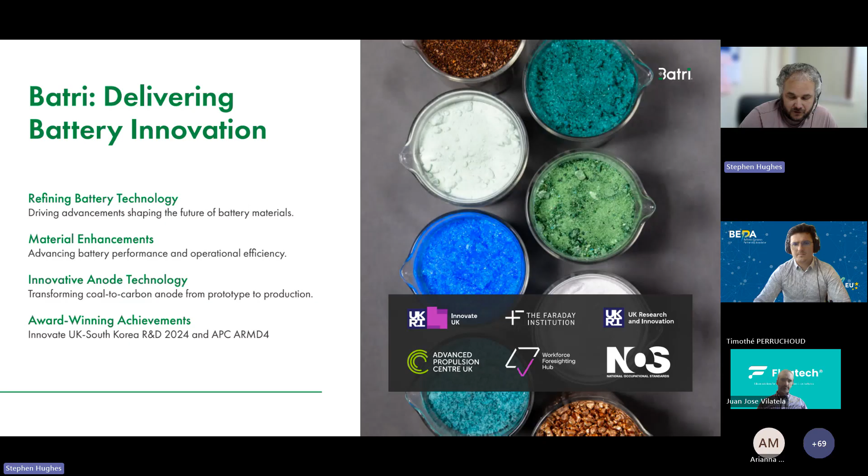Our main material, our focus of our first material, is an anode material, a hard carbon for sodium-ion batteries, and we use coal, locally sourced coal, to create this. So we've got a really secure and scalable supply chain. The good thing about talking to battery people is I don't have to go into supply chain issues and too much into what the current market is.

But if we just look at sodium-ion batteries and the potential for growth in this market, it's accelerating rapidly. We're seeing in forecasts increased production growing at an exponential rate, 150% increase in the tracked production volume for 2030 over the last couple of years. This is also seen with headlines such as CATL's Naxtra battery, and the US putting solid sodium batteries on the grid. So there's a lot of significant backing coming here.

The key thing that we're always asked is, where are sodium batteries used? It's not just for static storage opportunities, not just for grid scale storage, although that will take up a lot of the beachhead market. We're also looking at non-road automotive applications - your 2-3-wheelers, scooters, e-rickshaws, and non-road applications, forklift trucks or the vehicles you'd have at airports. They make up some really interesting markets that are niche, but they're high value niche. So this is where sodium has some key advantages.

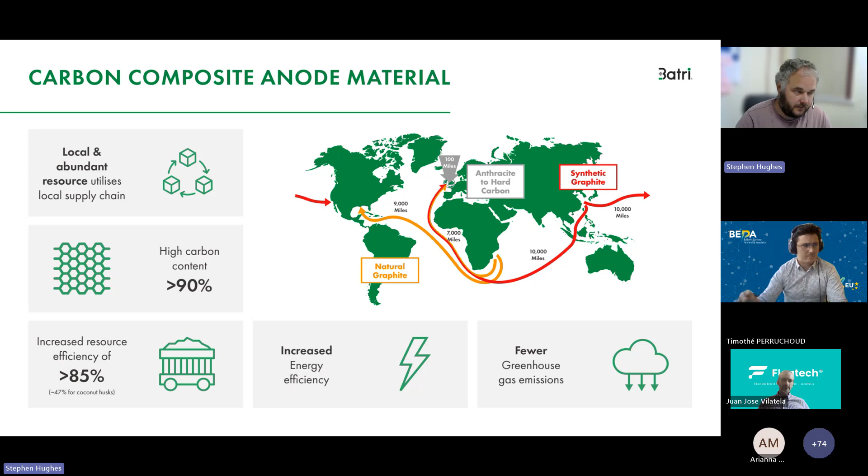Just a couple of slides on the data of our materials - I'll skip through these quite quickly, but we're commercially viable. We match and outperform a lot of the materials available on the market, and again this data is all backed up through academic verification.

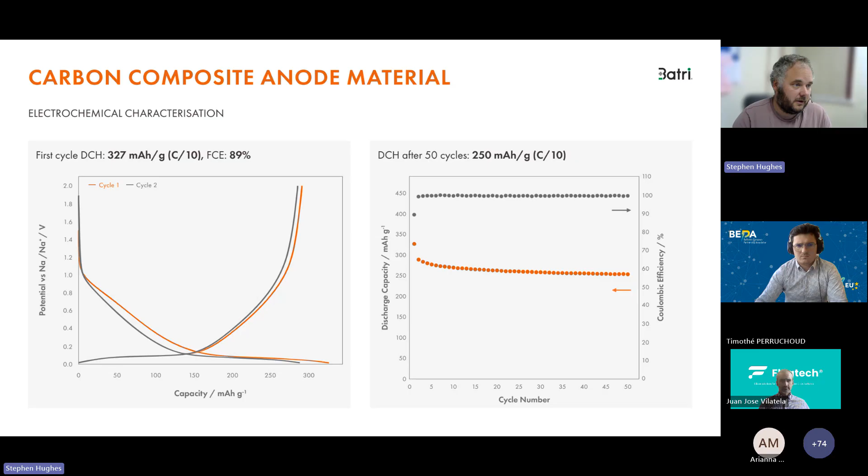Some impressive first cycle data here, reaching about 330 milliamp hours per gram. We've got really good long-term stability - you can see after 50 cycles it's totally flat, and then we did an extended accelerated lifetime test over 10,000 cycles where we retained approximately 87% of its capacity.

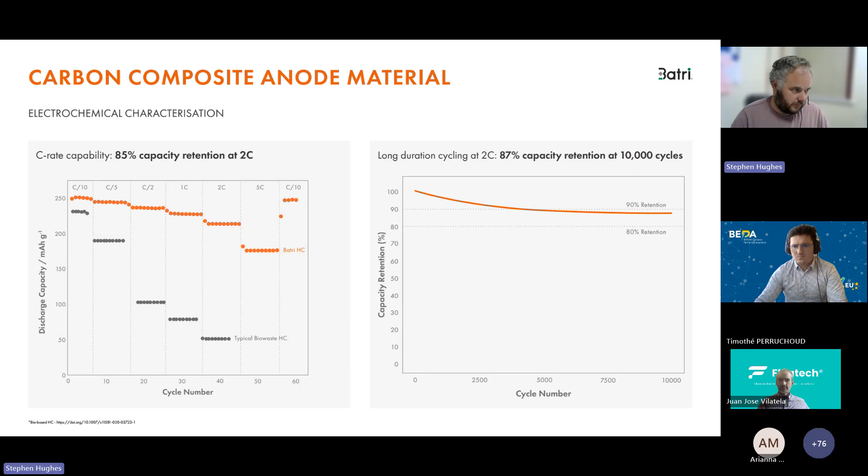The really interesting thing with the material we've produced is this rate performance. In real world applications where we're seeing these batteries go into potentially automotive, power tools, or static storage, where you need to cope with peaks and troughs, the performance of our anode material is really impressive.

Breaking news really - earlier this week we incorporated Batri US, so we can start working on the market over there. As everyone's aware, with all of the tariff things going on at the moment, it's really important to have US based manufacturing if you want to work in the US. So we're able to work on these transatlantic partnerships now, and that's opening a really interesting market for us.

The SNAP program that I touched on at the very beginning develops and integrates cells into products that will be made by our Korean partners, so there's a full cell development pathway we're looking at. We're seeking partners who want to put these into demonstration and pilot programs, whether that's e-mobility or storage applications. We're very open for collaboration here - we're not one of these companies that comes to you and says this is what we've got, you take it as it is. We like to work with people and try to give them what they need.

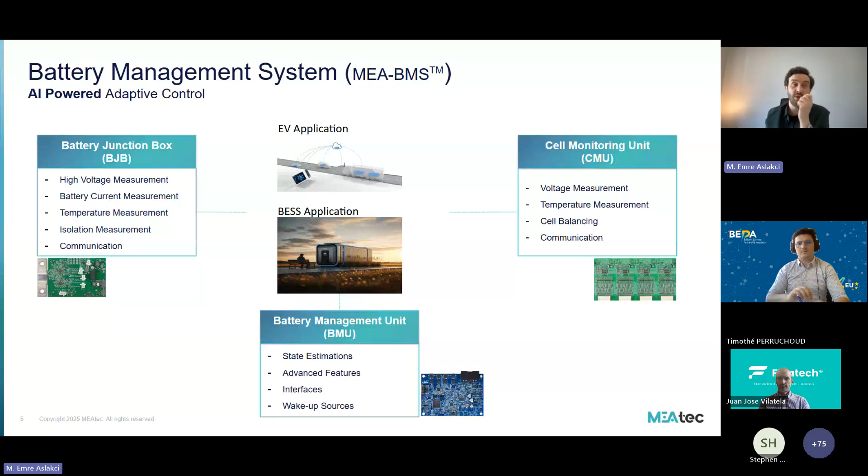If we break it down into each product, we have the BMS system, which has hardware and then the advanced software, which we are working on, especially nowadays we are intensively working on AI-driven functions to fit into the real hardware. This is a bit of a challenge for every provider, to fit these advanced algorithms into the physical system, but we now do this application. We also have POC-ready applications, and our solutions are applicable for both EV and BESS applications. What is different in our product?

This is AI driven, and we have a hardware independent solution, which means if you have your own hardware, we can come with our advanced software and fit your architecture, then run with our software. This is of course safety compliant, and while there are many BMS suppliers, there are very few automotive grade BMS suppliers. We are one of them. The key functions, SOC, SOH, and the safety functions, we implement with advanced techniques using physics-informed machine learning to have the best accuracy.

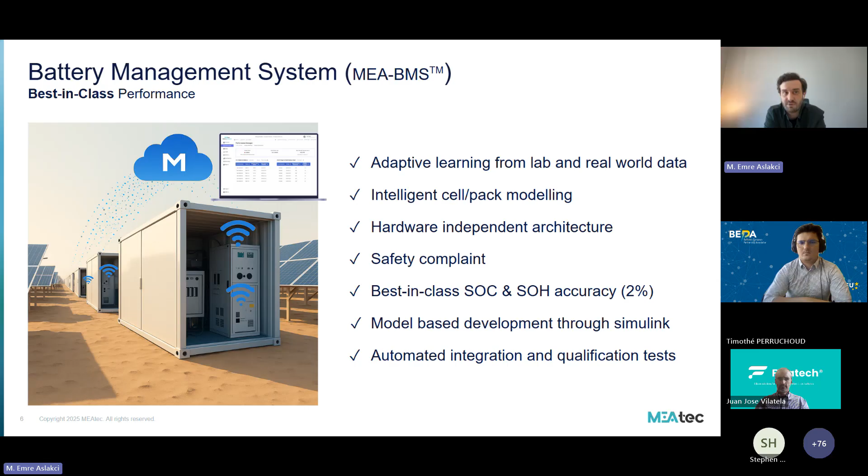And of course, the model-based development is important for the modularity of the software component. This is how our second product, battery analytics, looks.

Actually, we have two different platforms. One applicable for EV fleet management, the other one for battery energy storage. Here we use what we have in the physical BMS. Physical BMS can only detect what happens, but in the battery analytics software, we have smart algorithms in the cloud which can predict the future. That makes the difference.

We implement all of those things in the cloud application. In the physical system, everything is different - we use Simulink, Simscape, and real hardware. But when we move to the cloud, we use AI, integrating our software into AWS or other providers. Things are very different, but at the end, we implement both logics with our battery competence in the background.

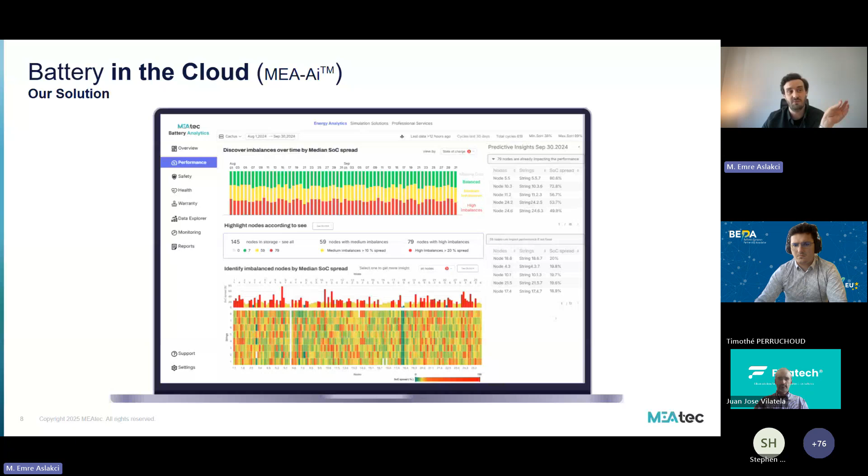This is how our solution looks in the user interface. We have performance criteria, safety, health, and warranty, and we can see each and every node in our platform for the customer.

This is also one of the architectural reviews, how it works. We get the data from the physical system, from BMS - this data is already available. We get this data either over TCP/IP directly with Wi-Fi or 5G, or through SCADA, depending on the application. The data comes to our cloud, and accordingly we run all of our advanced algorithms and the physical modeling we did for the battery and cell.

Our third product is the battery passport platform, which we offer to our customers. In Europe there are 6 to 7 battery passport providers, but we are different than them. What they do is get the data from the physical system, put it in the cloud, and read it out. We do it differently.

We create a digital twin of the battery, and we get the data. We use this data to also create usable information for the operation. We call it battery passport integrated digital twin in the cloud. This makes us different from the other competitors - we also bring our battery know-how into an application to give service to our customers.

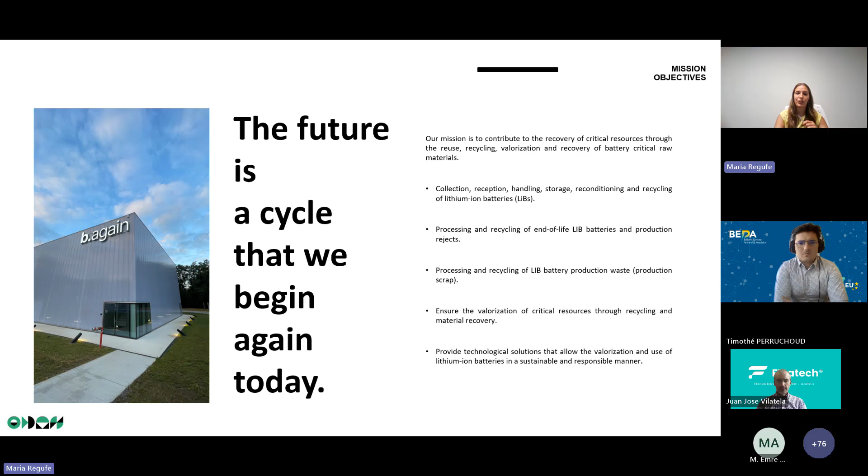Focus on b.again: b.again is another example of this innovation in the DST Group. Having defined our business areas during these 3 years, we present to our clients a range of processes and services that cover a significant part of the battery value chain, focusing mainly on battery reconditioning and reuse, logistics, safe handling and recycling of end-of-life batteries, and in the next stage, metal recovery after the production of the main recycling product, which is the black mass.

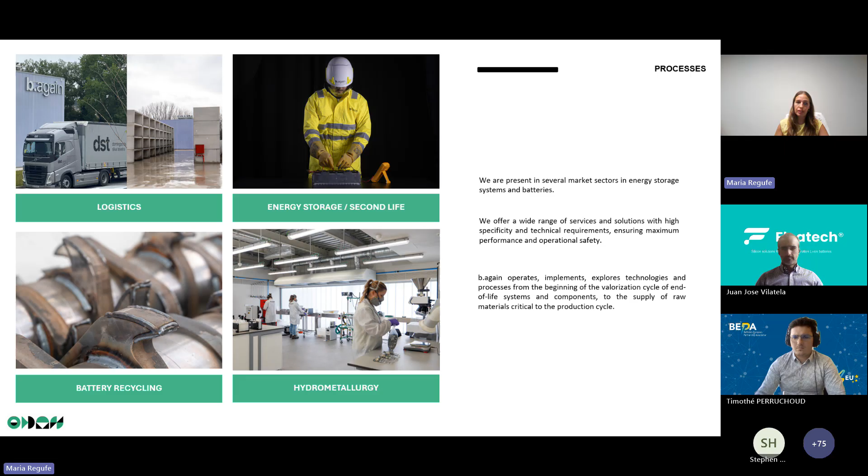We are currently operating in the logistics part of end-of-life lithium-ion batteries and developing our battery energy storage systems projects. Our mechanical recycling line is under licensing and will start operating at the beginning of next year, 2026. In parallel, we are developing our quality control processes for our products, as well as hydrometallurgical processes for metal recovery and valorization of these materials.

We have a battery warehouse allowing us to safely store the end-of-life batteries we are collecting now. We are also prepared to carry out ADR certified transport and have the necessary environmental license for the transport and reception of these end-of-life batteries.

Regarding the mechanical process, as I mentioned before, we are currently working on the implementation of the recycling line, which will allow us to recover materials from production scrap, such as battery cathodes and anode materials. During the process, we will also recover ferrous and non-ferrous components and others, while the black mass produced will undergo strict quality control, ensuring a quality product for our client.

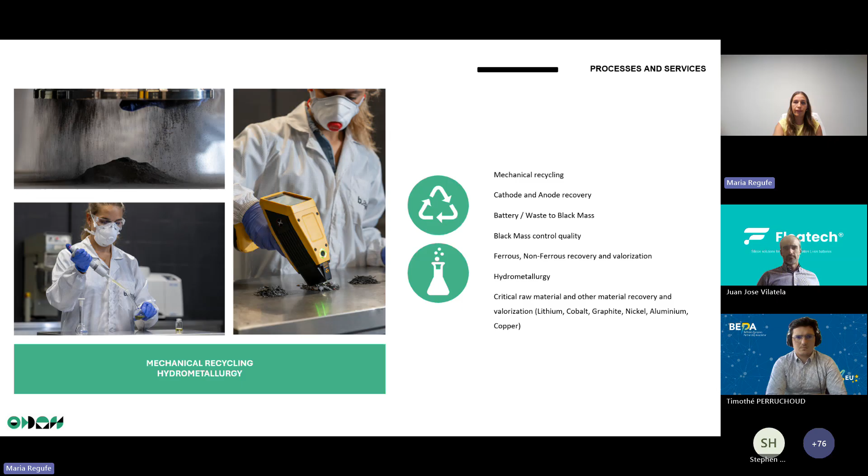In very general terms, a brief presentation of our mechanical process. Batteries are first diagnosed to assess either they can be used in second life applications, for example for BESS solutions, or they should go into the recycling line. In the case of recycling, they are discharged to ensure safe handling, and after dismantled, they follow through a shredding process and electrolyte drying, which allows for the mechanical separation of certain components such as aluminium, copper, plastics, and others.

The remaining fraction becomes black mass, and this is then subjected to chemical processes for metal extraction and purification, enabling the recovery of metals of interest. For example, either there's a mixed composition of nickel, cobalt, and manganese for the NMC batteries, or battery-grade materials ready to be used in the new production of cathodes for batteries.

Regarding the battery energy storage systems, we are prepared to design customized solutions based on the client's consumption needs. Our services and applications cover the residential, commercial, industrial, and utility sectors, and depending on the requirements, we deliver different solutions and functionalities, aiming to develop and implement efficient systems that can provide services such as voltage and frequency regulation or peak shaving solutions, demand response, among others.

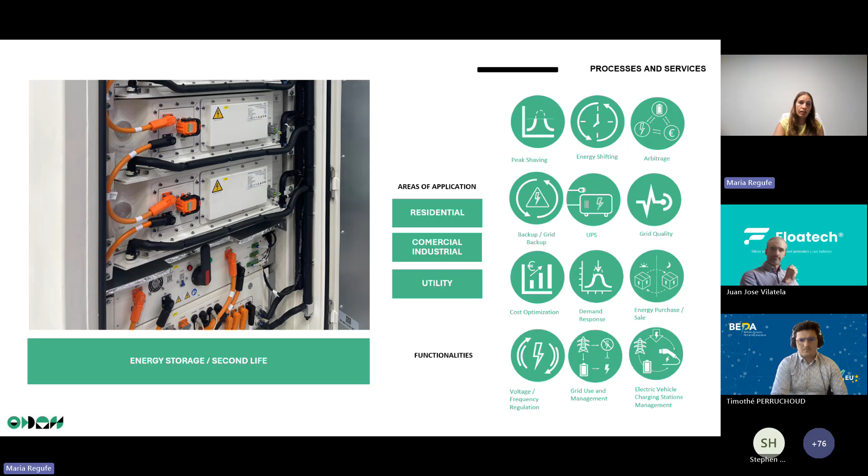This is our brief presentation regarding b.again, and I conclude my presentation. I think I made it in time. Thank you for the attention, and I'm happy to reply to some questions.

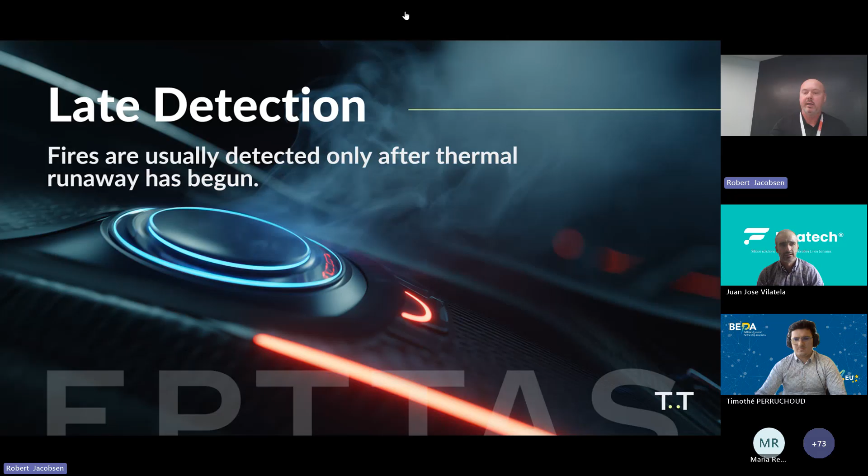Then you have a scenario with fragmented responsibility—battery makers, OEMs producing vehicles and trucks, leasing companies, importers, sellers. In a global market, everyone wants to sell, with small margins. So I think we can state that risks are unfortunately downplayed. If you ask any of these stakeholders, most of them will say the risk is zero, but the numbers show different.

The last big factor really driving this is political pressure. Governments are pushing for rapid electrification to reach climate goals—you have the Green Deal in Europe for heavy-duty electric vehicles, etc. It's a bit taboo to say, but it's possible that we don't speak enough about the safety issues that come along with it.

So technical barriers, industry silence, and political pressure makes this a little bit of a cocktail of stakeholders and impacts that is causing the problem.

So our solution to the problem: we looked into this again from our background in electrification from the start. We saw it coming, we've seen the lack of solutions, and we dived into it from an angle of seeing if it's possible to prevent it from happening, not only isolating incidents but actually preventing it. So what we've done is a software solution that's able to pick up early thermal runaway up to 60 minutes before, which is a game changer.

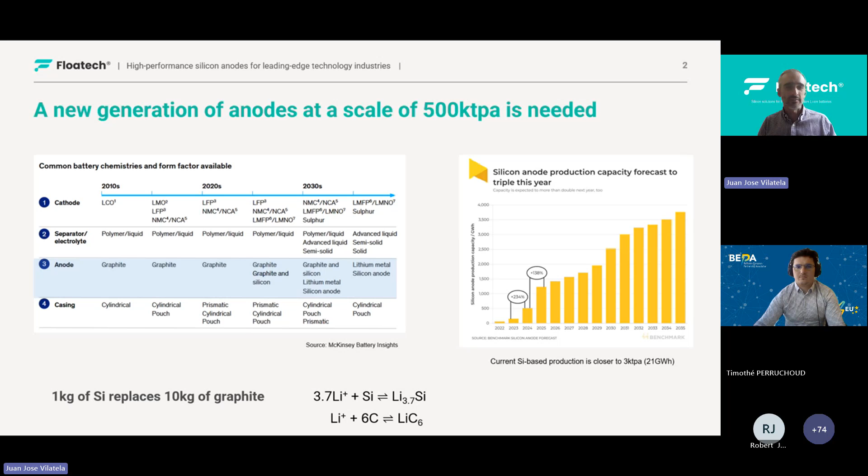What Floatech does is it supplies 3 products for this next generation of battery cells. One is a silicon anode for liquid electrolyte batteries, called generation 3B in Europe. We launched the second one, which is again a silicon anode for solid electrolyte cells, called 4A. And more recently this year, we started supplying a very thin silicon interlayer, which is used for lithium metal to improve its performance. I'll give you more details of these 3.

As a company, what we do is we work with the cell producer, and by giving them these products, we accelerate their cell development at the early stage, with the long-term view of supplying to them these materials at scale.

Importantly, these are finished products. They are anodes or sheets that can therefore be integrated in existing machinery for cell manufacture. That's important because for the cell producer, and ultimately for the user of the battery, this reduces cost by removing a lot of the capex and opex in cell production.

We don't produce powders that need solvents, binders, slurries, drying, and so on. We eliminate about 5 stages in electrode processing by providing a free-standing finished anode. Our projection is that these products will have a cost below 10 euros per kilowatt hour, which is well within the range for batteries to meet the cost targets, for instance, for electric vehicles.

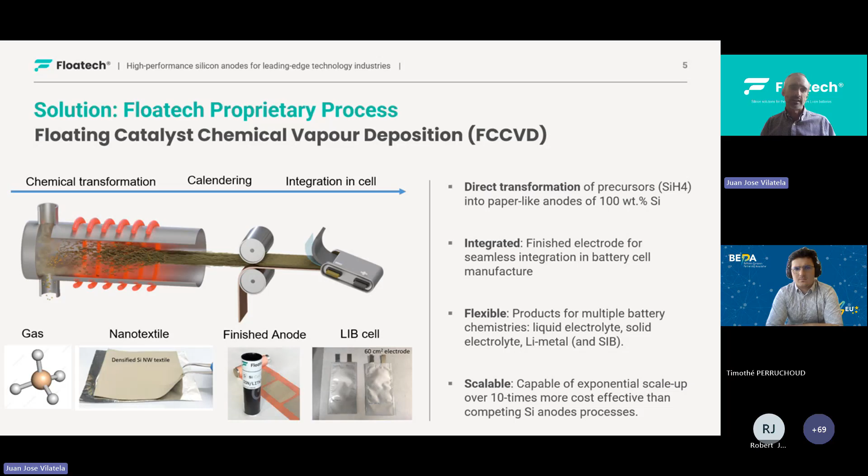I won't go into the details, but from a chemical engineering point of view, the nature of the process makes it about 10 times more cost effective and scalable than what our competitors are using, which is based on thin film technologies from optoelectronics.

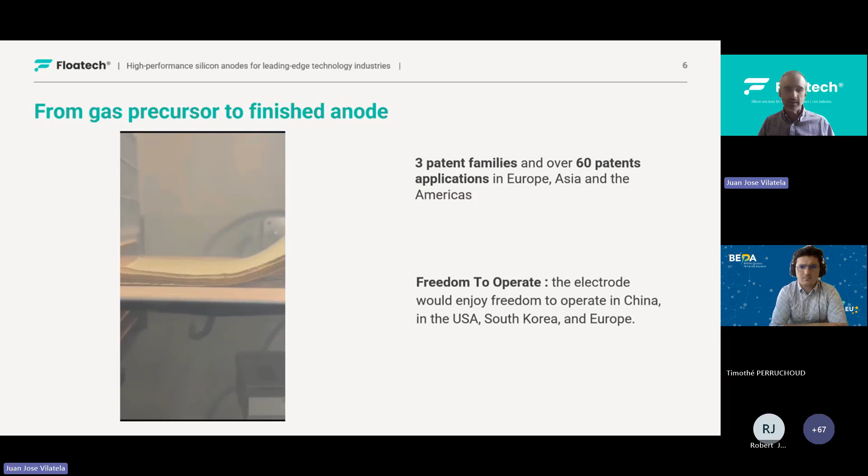This is what it looks like in the early days in our demo unit. You can see this is silicon being produced on a conveyor belt, and you can see this is coming out, and this is essentially like paper in terms of handling, and therefore compatible with roll-to-roll processing. The process is protected by patents in the most important territories around the world, and we have a freedom to operate report.

For liquid electrolytes, if you wanted to integrate it, what you can expect is that we can supply materials with a wide range of areal capacities, up to 10 milliamp hours per square centimeter. So essentially more than a regular cathode could match.

If this is of interest to you, if you look inside, this is essentially a porous network, and this is important because that way it contains the expansion of the anode active material within the pores.

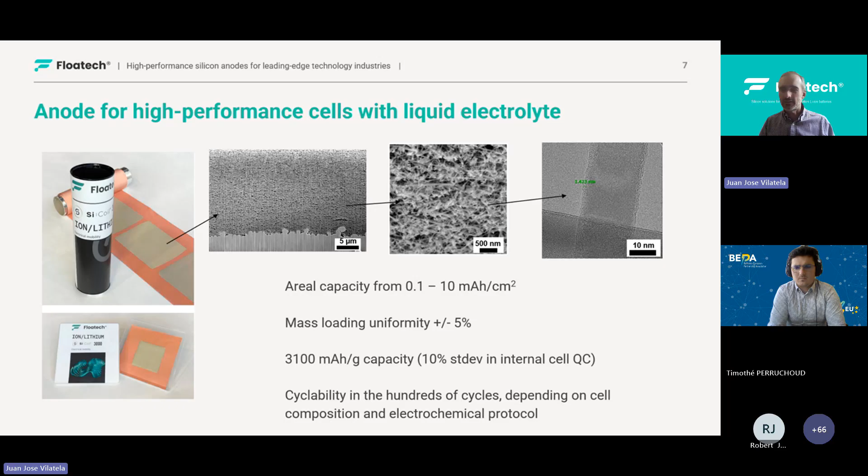Capacity of the anode, about 3,100 milliamp hour per gram, and cyclability in the hundreds of ranges. Any cell producer would want to know more details, which I'm happy to share offline.

This is the second product. This is the anode applied used for solid-state batteries, and the example I show here is for a ceramic-based electrolyte, a sulfide-based, which is, as you may know, the predominant choice for many electronic companies in Asia and the automotive companies. And what we see already after a year is capacity retention in the hundreds of cycles, no cell expansion.

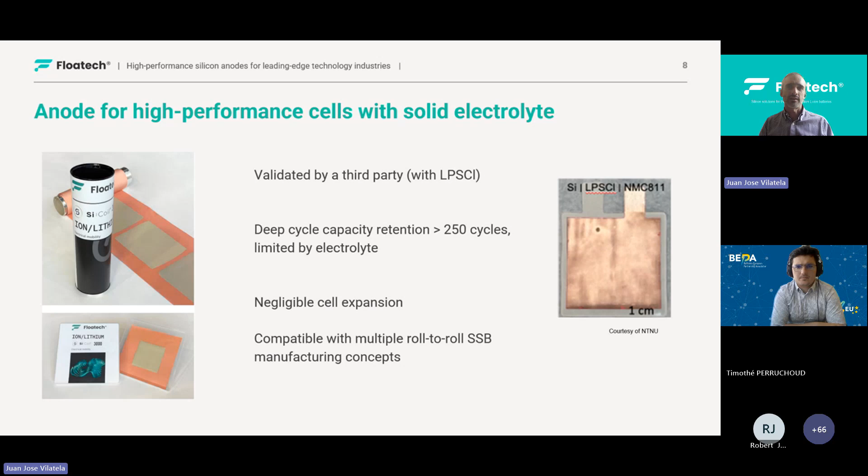And we are working with a couple of leading companies and research centers in developing new manufacturing schemes based on the ability to make freestanding material.

If you are a lithium metal battery company, our product is a very thin layer. This goes between the metal foil and the electrolyte. And what it does is it lowers the over potential for plating and stripping and increases cell cyclability through this lithophilic interlayer.

We can make them very thin, typically 8 microns, but we have a target of going down to 2 microns in thickness, and this is already being tested by established battery producers in Europe and elsewhere.

To finish with where we are and where we will be, we were born out of a European Research Council program in a research center in Madrid, and got a couple of a seal of excellence and award and a seal of strategic excellence from the European Innovation Council.

And after a seed round, we were able to build our own facilities and have a demo reactor whose purpose is to supply materials for cell development and validation, with a team of 8 employees growing to 10 later this year. And what we will be doing in the next years is now that the product is validated, to scale up for production for initial markets.